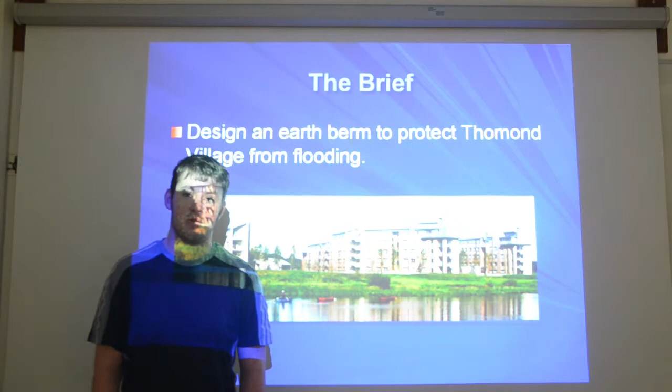Our brief specified us to build a berm outside Thomond village to prevent it from flooding. It showed us where to get the soil from for the berm, and it also stated that the berm should retain water without major seepage or failure. In November-December of 2009, the water level actually rose over the river embankment and flooded Thomond village, which caused a lot of damage.

What is a berm? A berm is a ridge made from earth, not allowing water to reach a contained piece of land. Here you see a cross-section of a typical berm.

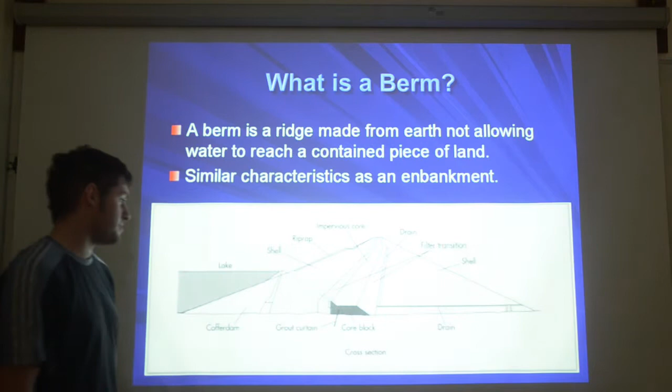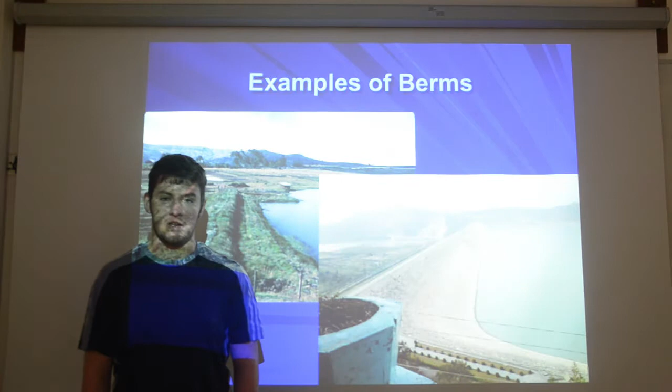Examples of berms. There's loads of examples of berms, and they come in many different varieties and sizes. The biggest of berms retain millions of litres of water compared to the smallest of berms, which only retain tens of thousands of litres of water.

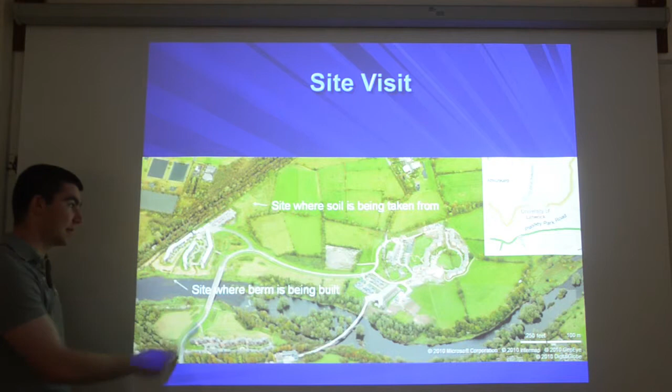On week 3 of our comeback right after Christmas, we went on a site visit to Thomond village. This site here along the River Shannon was where we were going to locate our soil to build the berm, and this is the site that we're actually going to build the berm on. The reason we went to the site was really to collect soil samples for testing, to check the various stratas of the soil and to check the depth of the water table.

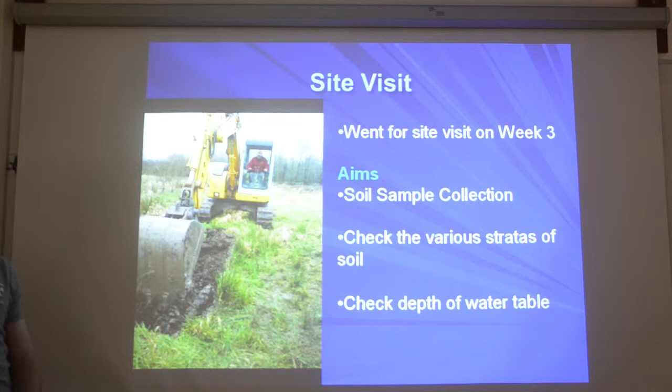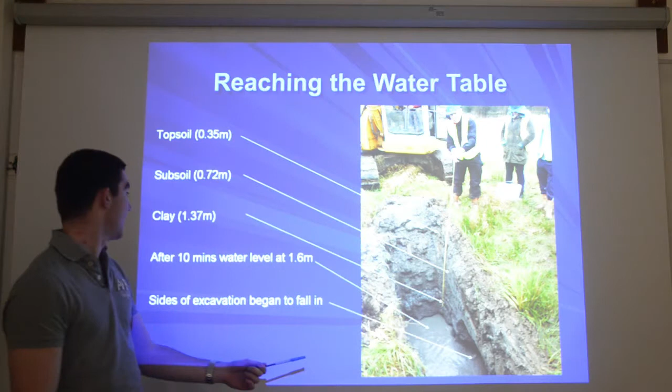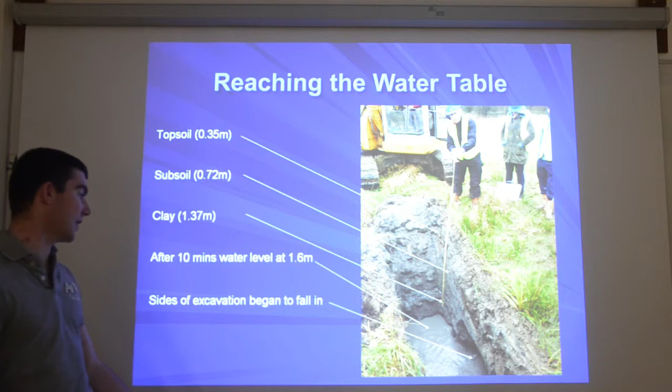From this diagram here you can see that the topsoil is at a distance of 0.35 metres below ground level. The subsoil is at a distance of 0.72 metres. The clay was at a depth of 1.37, and after 10 minutes the water table was at a depth of 1.6 metres. As the dig went on, we could see that the sides of the excavation began to fall in and it became extremely dangerous.

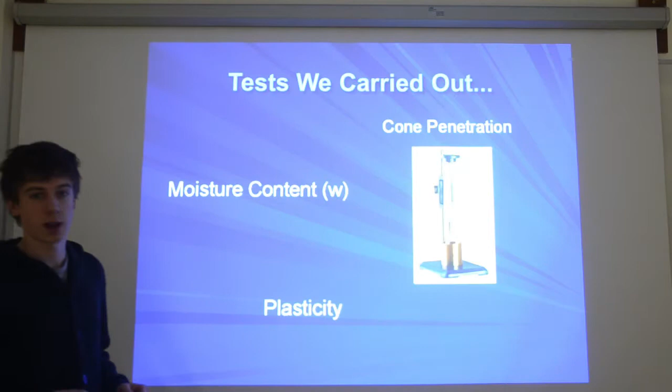One of the main reasons we carried out a trial pit was to obtain samples which we could then test on. We wanted to test our samples so we could characterise our soil. Some of the tests we carried out were cone penetration, water content, plasticity, sieve analysis, Proctor test and specific gravity.

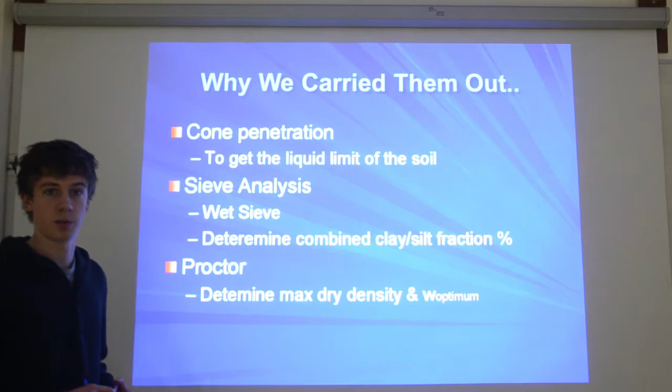The way we carried these out: we carried out the cone penetration to allow us to get the liquid limit of the soil, and sieve analysis to determine the clay silt fraction percentage. We actually used wet sieve analysis because we had fine soil particles in our sample. The Proctor test allowed us to determine the maximum dry density and the optimum water content. Once the soil is at its maximum dry density, it is at its highest strength.

For the analysis of the results, we got our moisture content of the sample, which was 37%. Our liquid limit was obtained at 60%. From tables we could work out that our soil was of high plasticity. Our specific gravity was 2.6. For our sieve analysis, 99.7% of our soil was finer than 0.06 millimetres.

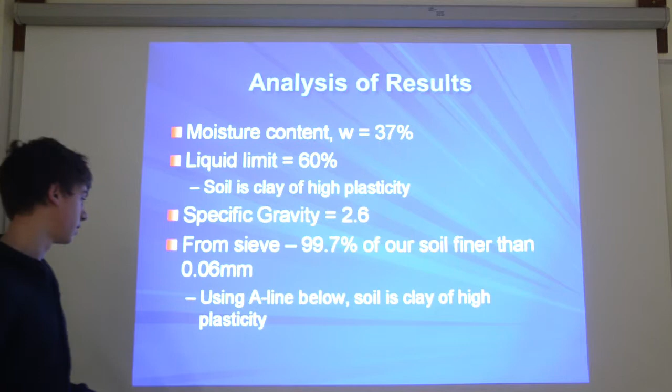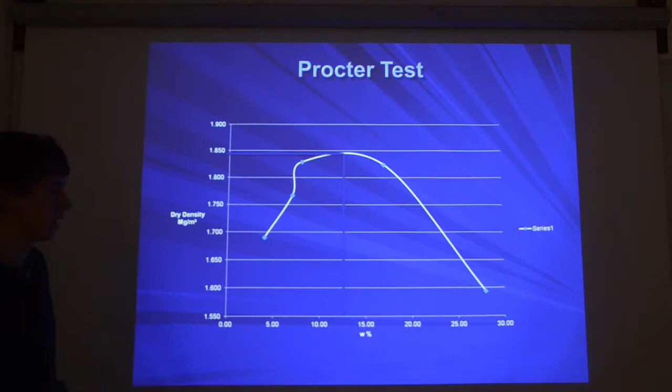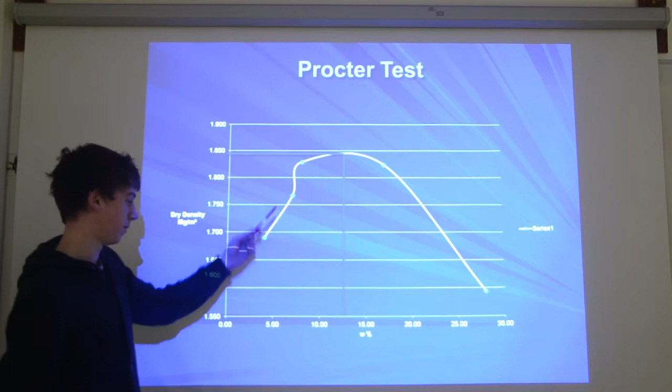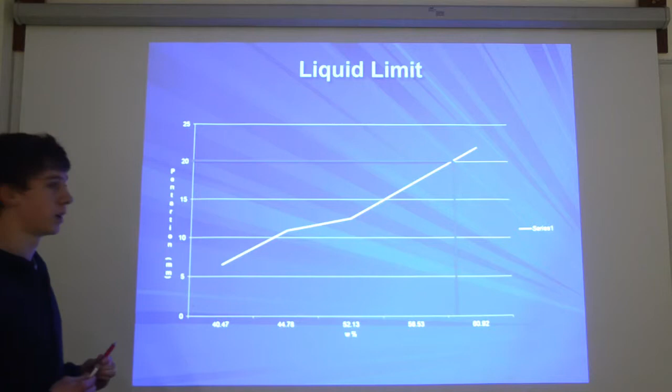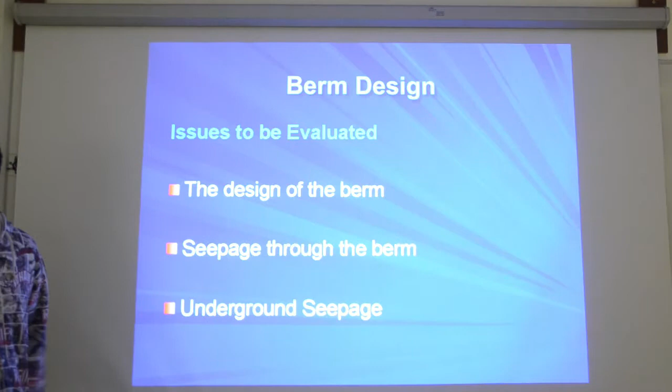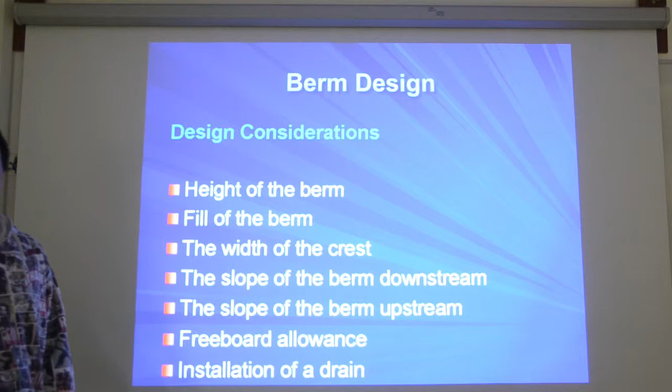Some of the issues which had to be taken into account in designing our berm were the physical design of the berm, the seepage through the berm, the underground seepage and the erosion of the berm. There are many key design decisions which were made throughout the project: the height of the berm, the fill of the berm, the crest width of the berm, the slope of the berm downstream, the slope of the berm upstream, the freeboard allowance and the installation of a drain in the berm.

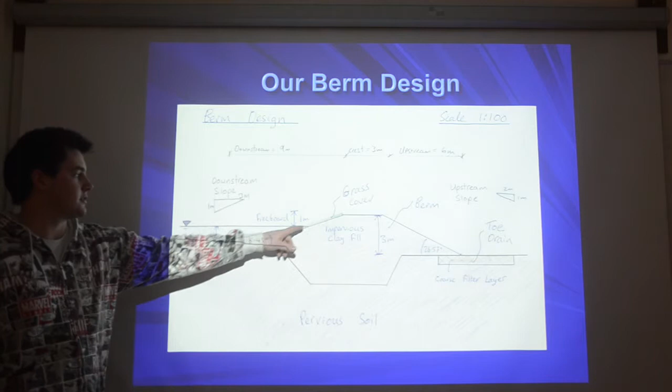The installation of the toe drain allows the seepage to exit the dam without causing excessive erosion. Also, as you can see here, there's grass on the downstream slope of our dam, which also provides a counter reaction to erosion.

Using the height of our dam, our crest width, and the slopes of our downstream and upstream faces, we were able to calculate the angles needed at our downstream and upstream slopes, which were 18.43 degrees and 26.57 degrees.

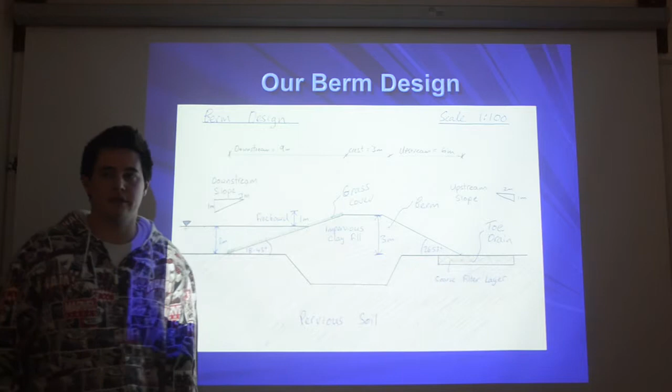I will go through the next few minutes about three main factors that influence our berm design: seepage, piping, and erosion. It's worth noting that our berm will have seepage despite its low permeability.

Seepage is the seeping of water through our berm. To counteract that, we introduce a toe drain at the end of the berm so the water can flow safely out without eroding it. Seepage only becomes a problem when there's a build-up of water in the berm, causing erosion. It's worth noting that the phreatic surface, or top flow line,

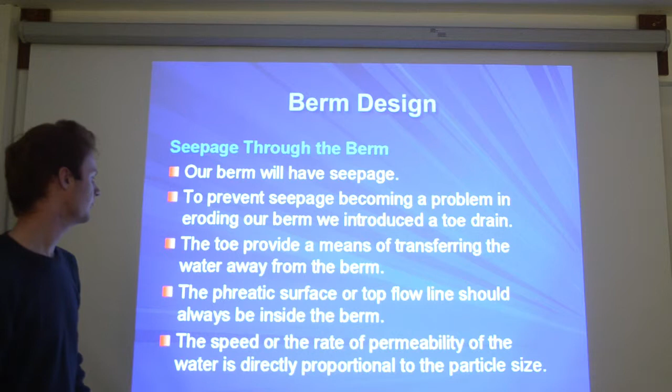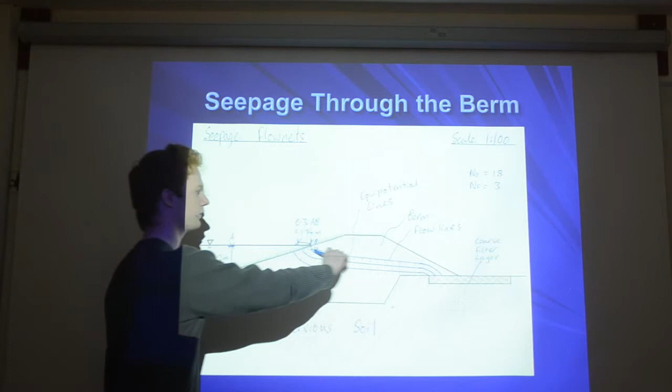always has to be inside the berm. If it isn't inside the berm and it just flows out through here, it will erode the berm and lead to ultimate failure. Another thing we had to consider was piping.

Piping is the unstable condition when the upward force of the seepage pressure exceeds the weight of the berm. In other words, if the upward force is greater than the downward force, that leads to an unstable condition and will result in the failure of the berm.

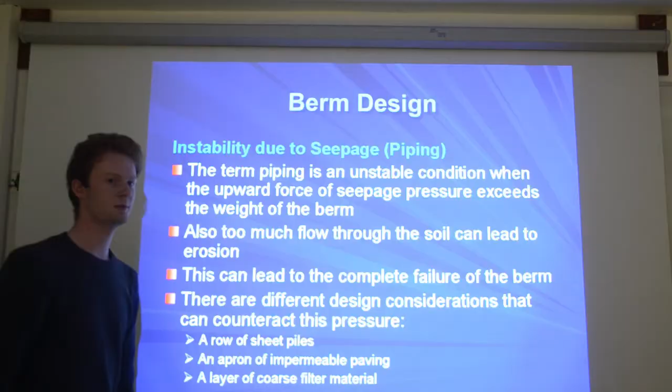So how do we prevent this? What we did was extend the berm downward to increase the flow lines, or the distance travelled by the flow lines. By increasing this, we're decreasing the upward force.

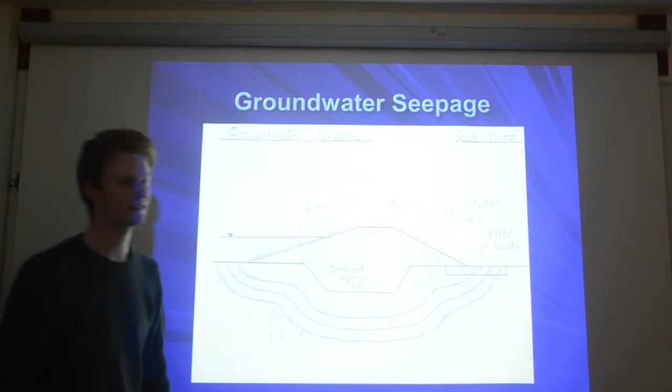Also, we introduced filter sands over the far side. The reason for this is that when the upward force is acting, it will create a void here if there's nothing acting on this. By introducing filter sands, we filter the water through and end up with no voids.

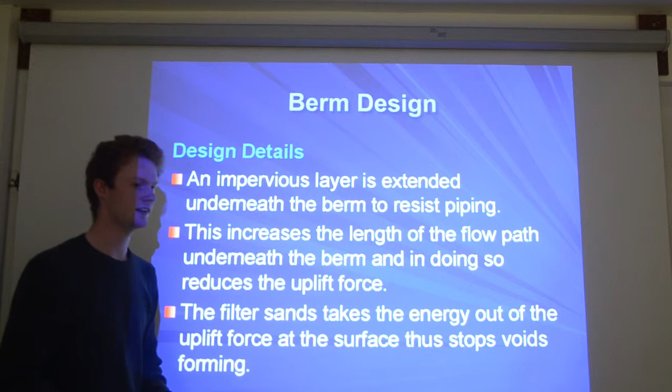Other things we could have done were introduce piles or filter layers at the end to resist it. The final thing I'm going to talk about is erosion.

Erosion can happen in different ways. It can erode the downstream face, it can crack the dam due to piping in the berm or piping up underneath the berm, and animals can also cause erosion.

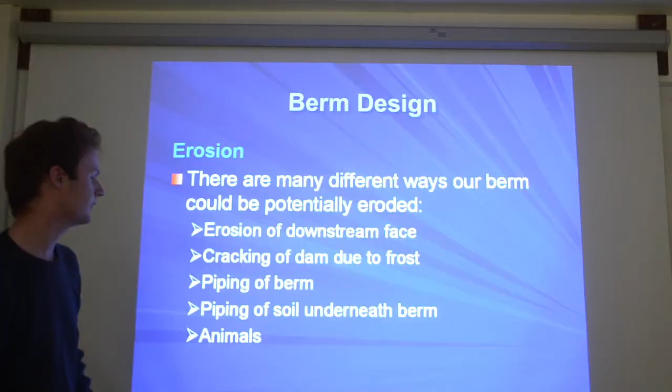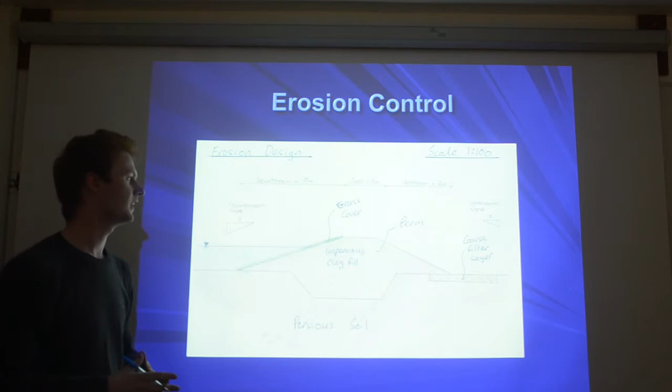What we did was introduce a grass cover here to resist erosion. By introducing this grass cover, it helps compact the soil, and it also acts against frost.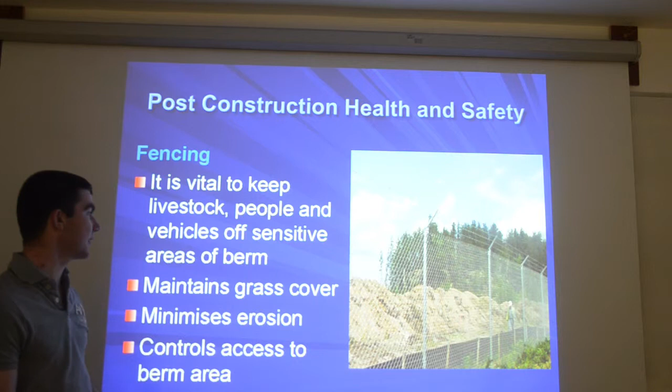The final part of our project is the post-construction health and safety plan. Fencing is a very important aspect as it is vital to keep livestock, people and vehicles off sensitive areas of the berm. This helps maintain grass cover, minimises erosion, and controls access to the berm area, as seepage problems occur from tyre tracks or animal tracks.

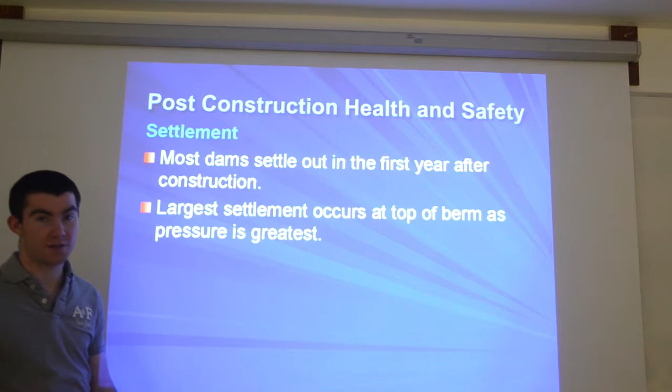Settlement is also a very large issue in our project. Most dams settle out in the first year after construction. The largest settlement occurs at the top of the berm, as the mass acting down is highest and the pressure acting on the foundations is greatest.

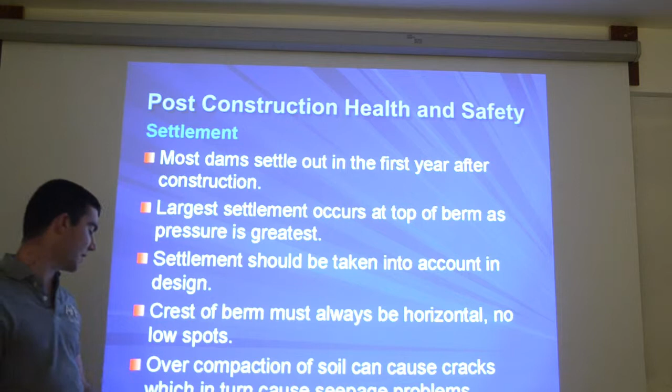Settlement should always be taken into account during the design process, not left until the very end. The crest of the berm must always be horizontal, with no low spots, as this can cause seepage problems. Overcompaction of the soil also creates cracks, which can cause seepage problems and affects the settlement of the berm.

Seepage and drainage is a very important issue, as all berms leak to a certain extent, as Aidan pointed out earlier. It's only a problem if it affects the embankment, which is the berm itself, the spillway, which is the cross section, or the outfall, which is at the very base.

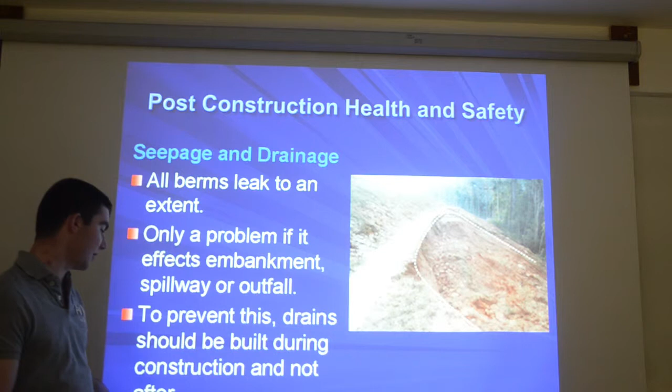To prevent this, drains should be built during construction and not after, to relieve the water that's flowing through. Trees and bushes as well.

They should never be allowed to grow if they have deep roots, as this can cause cracking in the soil, which can lead to erosion and seepage problems, and also assists with the maintenance of the berm.

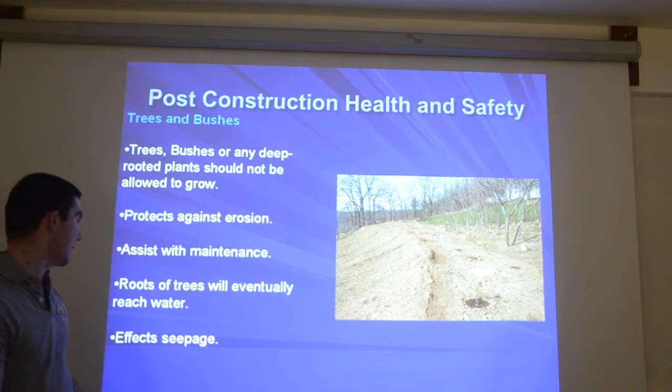Animal activity is also very important to prevent against, as constant inspections should take place to make sure there are no mounds by termites or burrows by any sort of ground-living animal.